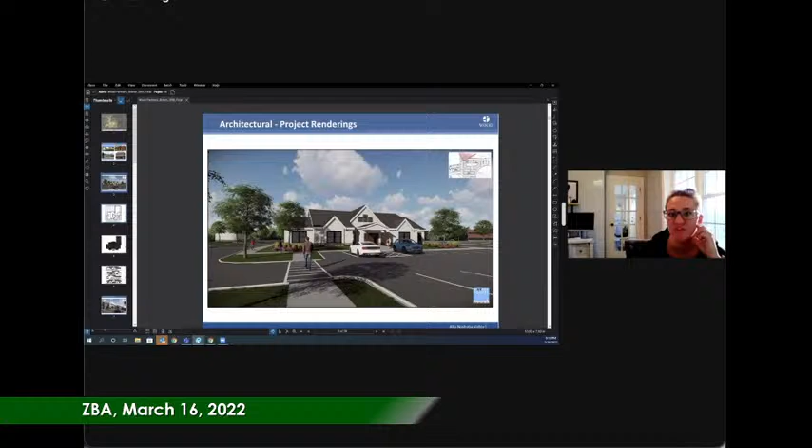What's the square footage of the Clubhouse Building? Let me see. I can have a number written here, but Jim, do you have that number handy? Yeah, it's just under 5,000 square feet. Okay, thank you. There you go.

So again, here's the plan of that Clubhouse Building. Again, it's broken up to break up the scale. It's not a simple box.

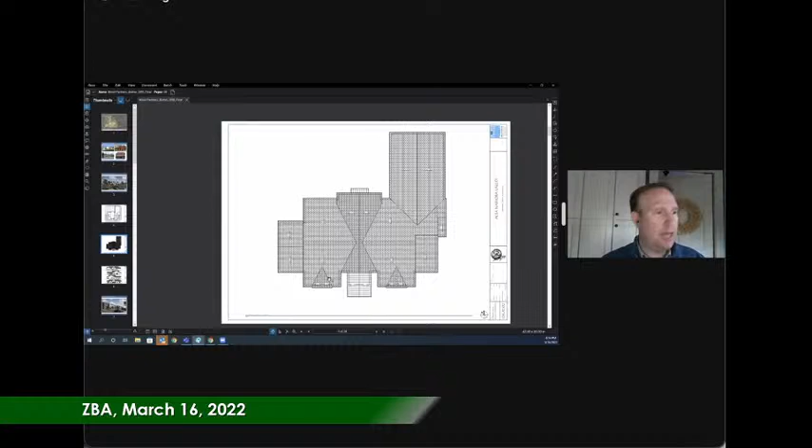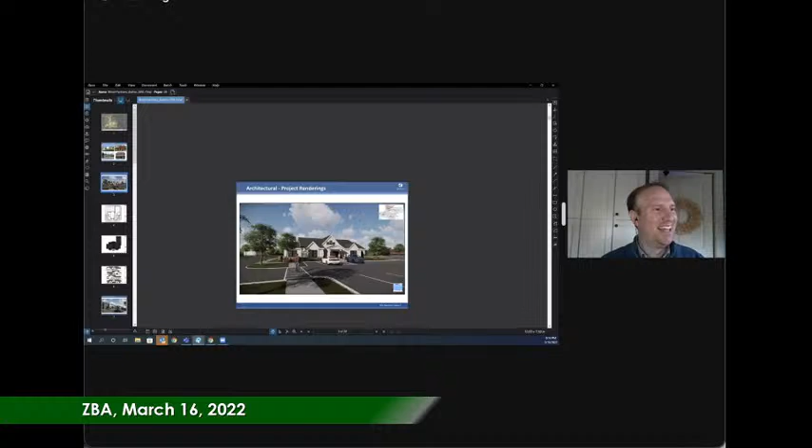And then that further allows us to break up the roof plan. As far as traditional New England architecture is concerned, there's a lot of variation in the roof plan to break up the scale, traditional New England gables, all working together to create a nice piece of architecture at a scale that's appropriate to its use.

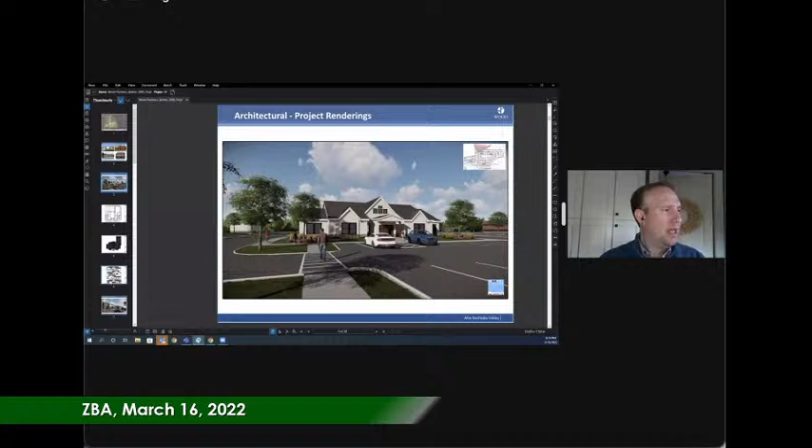And then the last slide in relation to the clubhouse. I don't know why these are all jumping around in scale, I apologize for that.

These are the rendered elevations of the building. So you can see we're doing traditional punched windows. We've got a mix of horizontal lap siding, and at the entry piece we have some board and batten siding. We've got some elements really indicative of barn architecture, both on this end and at the main entry. We did talk with the DRB about our fenestration here, and that's something we're going to be looking at a little bit more closely over the coming weeks. But I think from an architectural scale and general aesthetic, we have some fine tuning to do, but by and large, this is the grand scheme of the approach for that building.

Any questions on this one, or you want me to just keep going?

No, Adam. One comment was just for the board members that weren't able to participate or listen in on the DRB. The DRB was favorable to this design. They did appreciate the inclusion of the precedents and the general window structures and the roof lines and things like that. So it was favorably received with some comments.

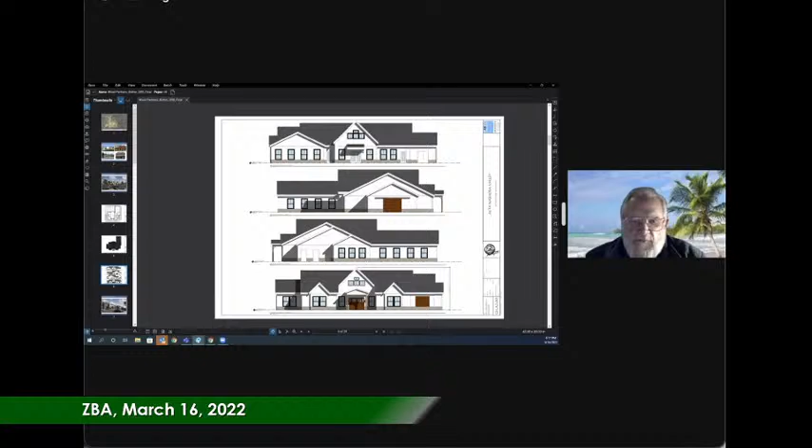It looks beautiful, but is there consideration given to where solar panels might be mounted on the southern face? DRB asked that as well. I know that Wood Partners is currently working on a project that they're putting solar panels on. And yep, if you want to respond further.

Yeah, I'll jump in and answer that, and Mike, feel free to jump in as well. Tony, our focus right now on solar has been on the two larger buildings. We hadn't necessarily looked at it for the clubhouse, and we didn't feel like we had a lot of space to work with on the two smaller buildings, if you will, but the focus on what we had been talking about internally was on the two larger U-shaped buildings, but it's something we can look at here as well.

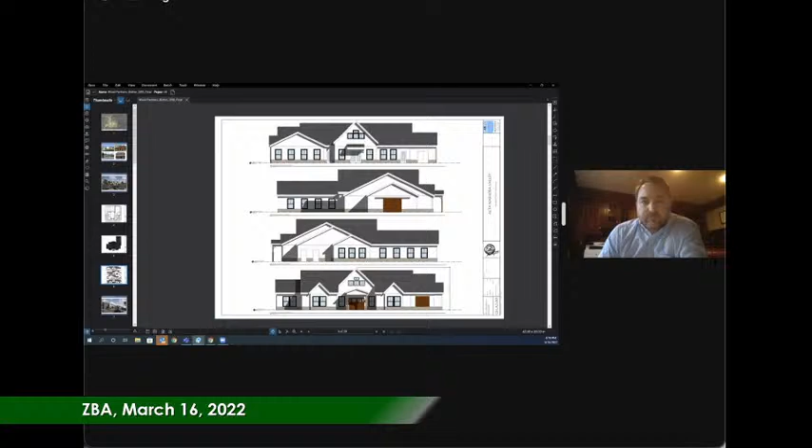Any other questions at this point? Or should I just keep trucking?

Adam, just real quick, because I know it came up sort of toward the end in the DRB, just orientation, so everybody's clear on sort of what you see when you come in the drive and what we're looking at, if you don't mind. I know the site plan wasn't loading all that well, but if you could try that again, just to make sure everybody's clear on that. Yeah, let me just give it one second here.

All right, so we've got Main Street here, we have the main entry in. We've already talked about the clubhouse. This is the mail package room, I'll be coming back to that one. We've got two U-shaped multifamily buildings here, these are both 3-story buildings, and I'll be going through the architecture on those. And then we've got two bar-shaped multifamily buildings, again these are 3-story. And then this building, and this building, those are garages. They're enclosed garages for tenants that desire that. And we also have the architecture of those buildings here in this presentation, I'll be getting to them.

Any further questions there? Okay.

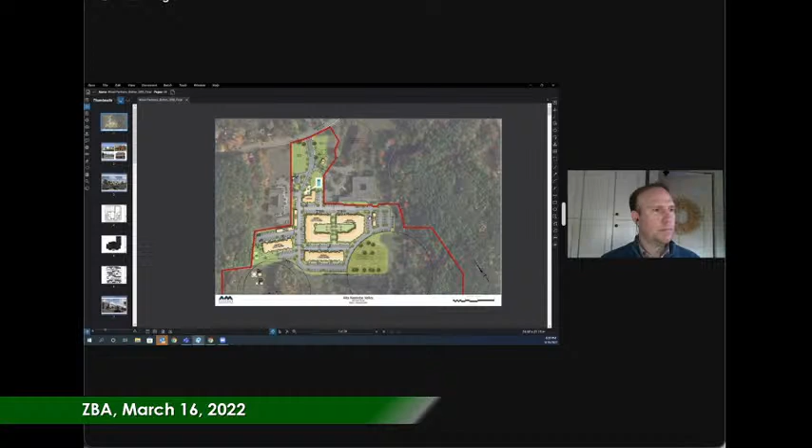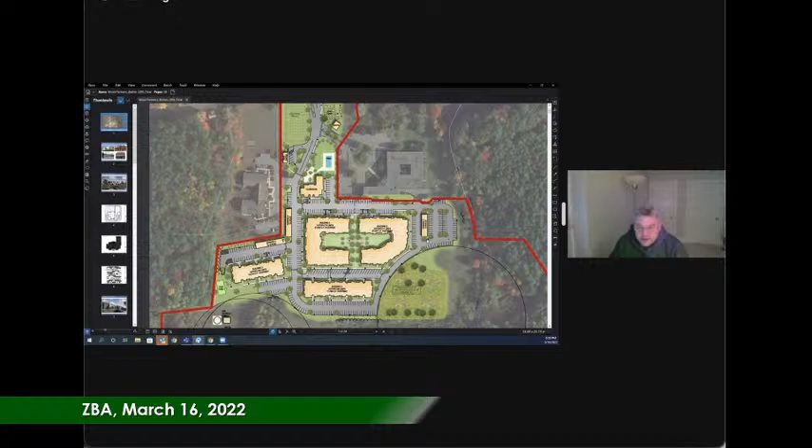The one near where your cursor is. I was just wondering about placement on that. Why wouldn't you opt to put it further away? Does it block people's views of their cars? Might it be a security thing where people can't see what's going on behind that building? Just throwing it out there. I didn't know why you chose to put it so close to the building.

It's a valid point. I think part of it is that this is certainly a nice amenity for some residents, and something they'd pay a premium for. So to have easy access from your residential building to your garage space is certainly advantageous. But we should consider sight lines and security — if you can't see out your window to see your vehicle, it's a little more troublesome than if the vehicle is easily seen.

Is there lighting in that general vicinity too? I know we're getting away from this, but I'm just wondering what the lighting is like there. Yeah, you can see these little black boxes around the perimeter of the parking lot — those are the exterior light fixtures. We don't have them in this package unless civil has it on theirs, but they'd be cut-off light poles in this area, for a security standpoint.

But the point is well taken that this certainly blocks the view to these parking spaces on the backside. That's something we can talk through with the development team, with the landscape architect, with the civil engineer.

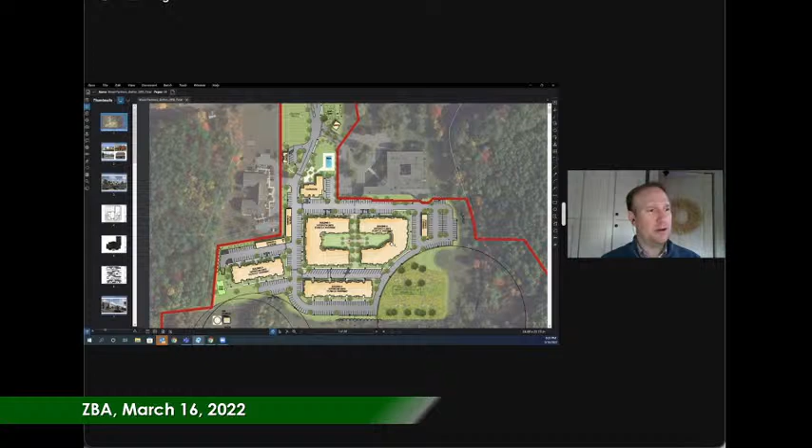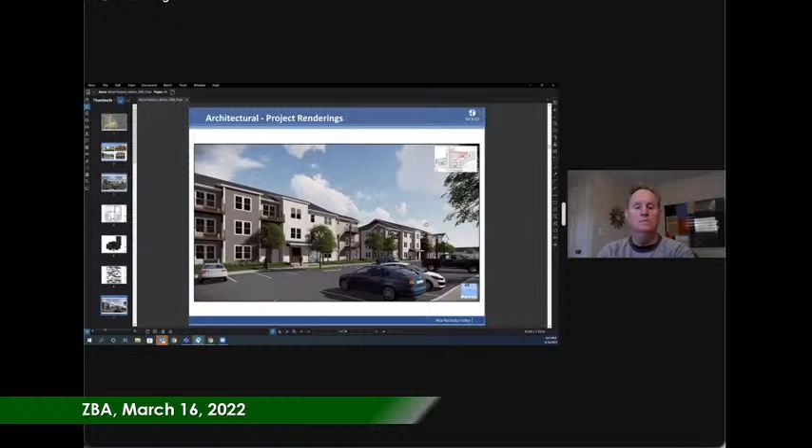With that, I'm going to move on to the architecture of the two U-shaped buildings, and I'll pull up this slide next. Again, you can see a small site plan here, and this cone of view basically shows where you'd be positioned and what you'd be looking at. In this case, you're looking at the edge of one C-shaped building and then the other edge of the other C-shaped building. Again, we've tried to break down the scale of these buildings, present them so they don't seem overly large, and incorporate elements indicative of the architecture there in Bolton.

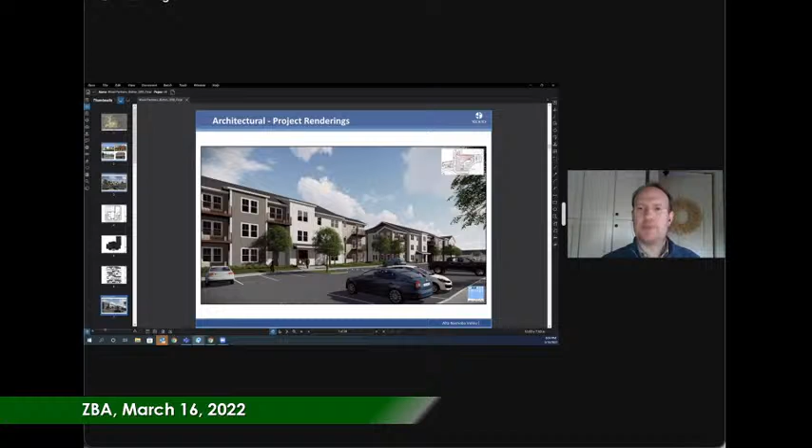Predominantly we've got horizontal siding with vertical trim bands that would probably be AZEK or something similar. We've got balconies with railings for the residential units, and architectural elements at the main entry so you identify the entry as something a little different. It's hard to see in this rendering, but if I scroll in, you can see the horizontal siding — we're using vertical board and batten at the main entry pieces, just so they really get identified as where the entrances of these buildings are, make the entrances a little special, and break up the architecture, again making it more consistent with things you have there in Bolton.

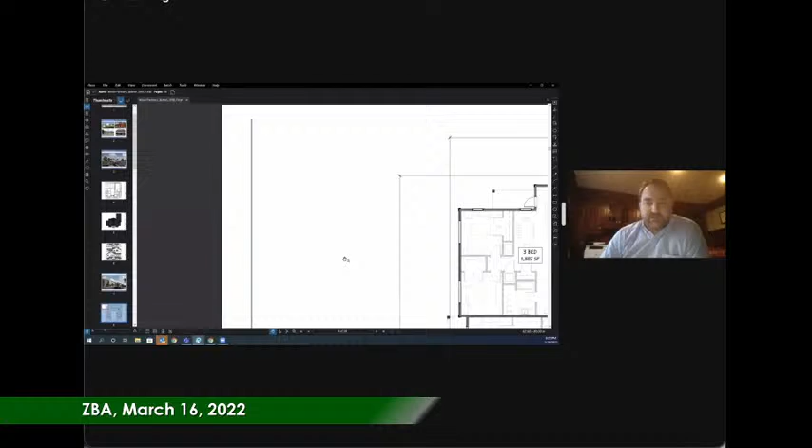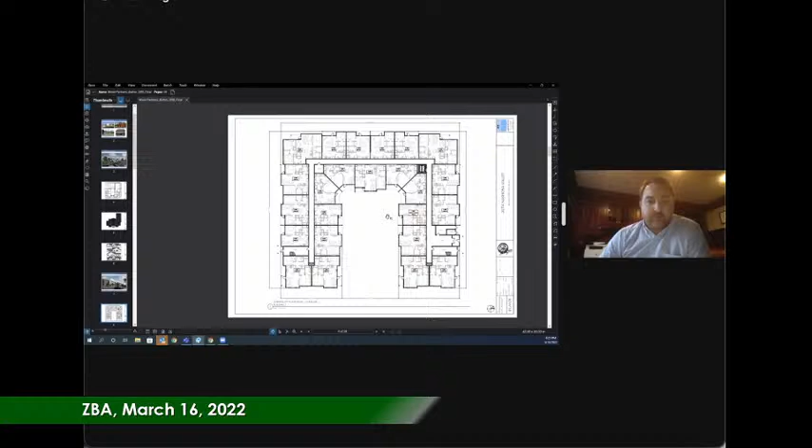Adam, if I could just jump in. Mr. Chair, similar to what you mentioned with the clubhouse, I don't want to speak for the DRB, but I think overall the buildings were well received. There were a handful of comments we're looking at, particularly on that elevation we just saw. Adam, I don't mean to steal your thunder if you're going to get there, but there were a couple of comments, including looking at some pops of color maybe in the doorways and things like that that we're considering as well.

There was a comment about the doors to the right of center, by the balcony decks, where there's a gap in height with the windows and doors. We did have a conversation about these, and about these kitchen windows as well.

One comment was that they wish these kitchen windows were larger. But if they become larger, it interferes with our upper cabinet space in the kitchen, so that's something we're looking at.

Another comment was about a door with double hung windows right beside it. The double hungs get pulled up off the floor since you wouldn't have those all the way down, and that creates a differentiation in height. We had a conversation about that because we like these large windows, as they provide light and air into the units, but we understand it creates an interesting detail between the doorway and the windows themselves. It's something we're going to look at.

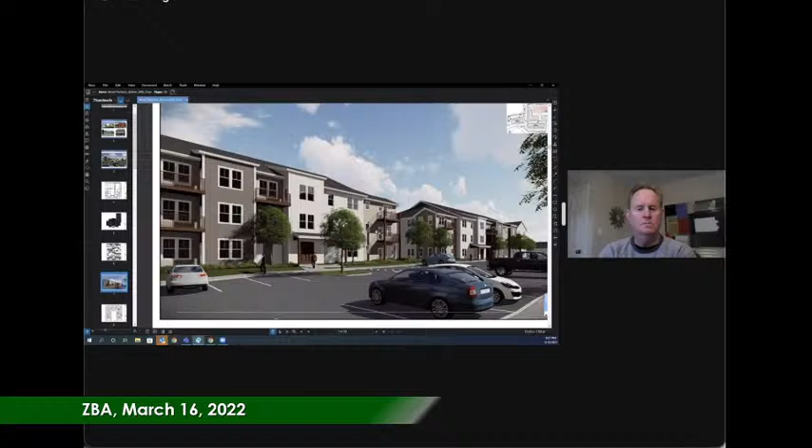We got some excellent feedback, and they're all things we're going through at this point.

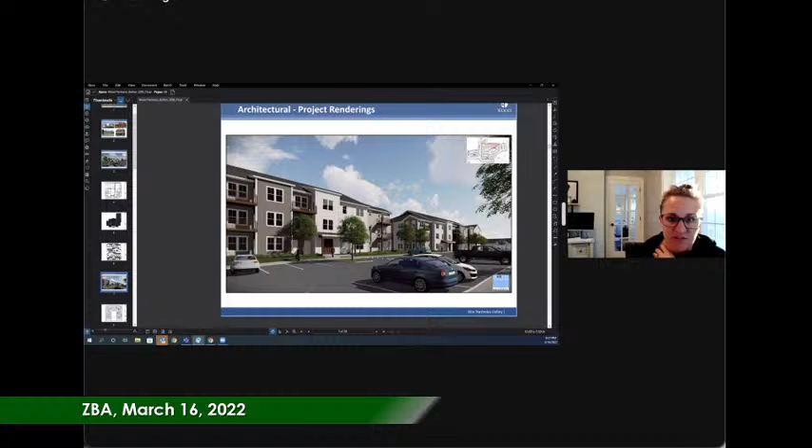Can I ask what the material is for what looks like wood accents around the entry? What is the intended material of those posts? Those won't be real wood posts, I'm assuming. We're still determining if they'll be actual wood or a steel column encased in either wood or a wood-like material.

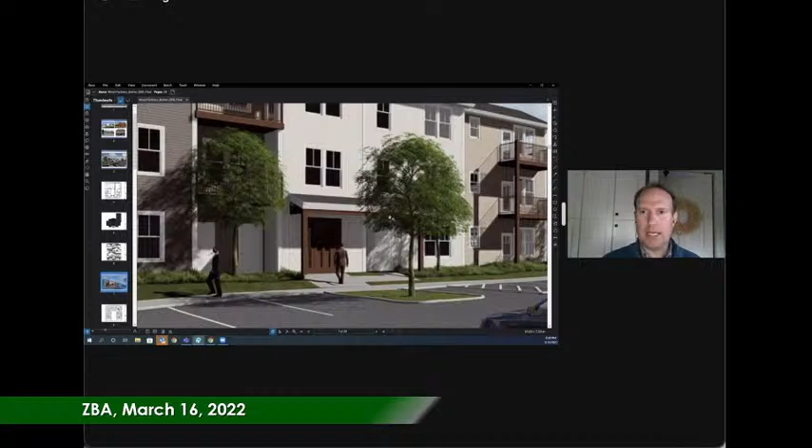We haven't gone through a full structural analysis of this building yet, so we need to work with our structural engineer to determine what we need to do. We need to leave it a little open-ended at this point, as far as the look and feel is concerned.

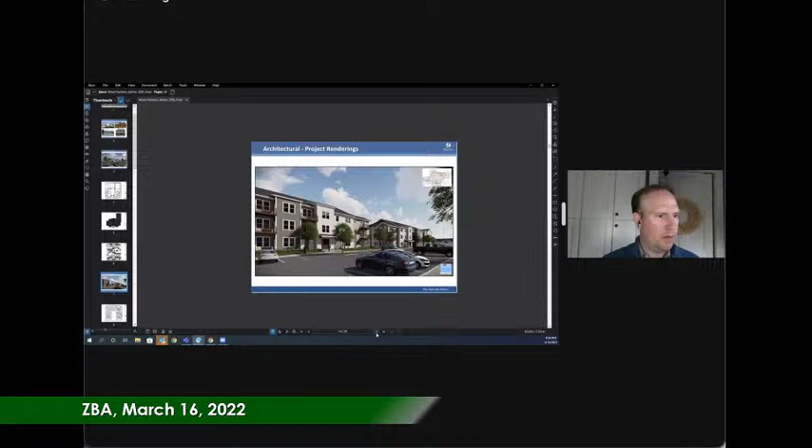The last slide I have here is the roof plan. We've got a lot of articulation in the roof—some gables, some sheds. We're using the roof for our mechanical systems, so we've taken a piece out of the gable roof to create a flat area where we can put all the condenser units. This allows us to clean up the ground level and get them up out of the way.

And again, from a solar perspective on these roofs, Wood Partners is currently doing a project using solar. It's something that deserves further exploration for this project, but we're not there quite yet.

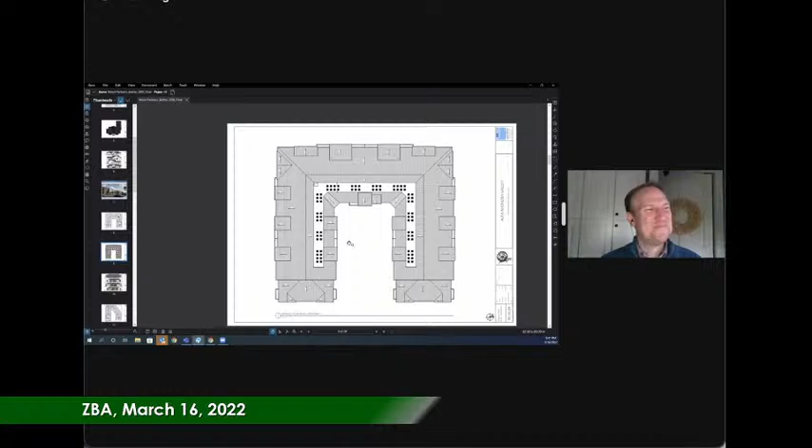Let me jump back to that slide. So again, here's the flat portion of that roof. This is at the roof level—you really have to be quite a ways away in order to see it, and given that it's on the inside of the courtyard of the U shape, it's pretty well screened.

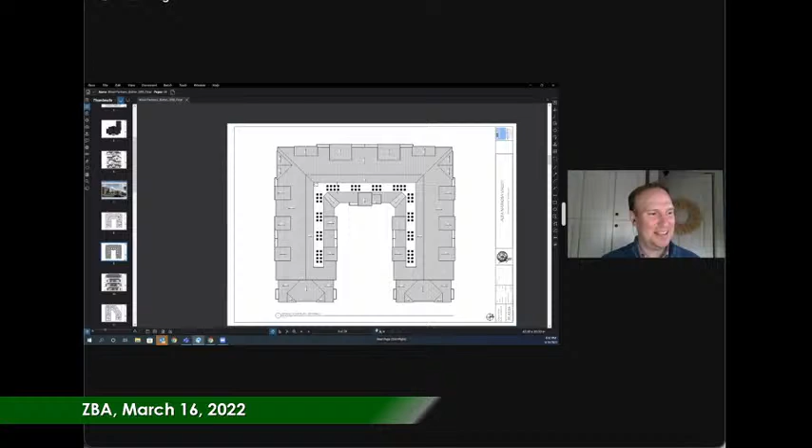For anyone who has dogs and does Zoom meetings, you know what I'm dealing with. I have cats, and one night last week, the cats were in our room, in the bedroom, and a neighbor's dog barked at like 1 in the morning, sent the cats flying. As they ran across the bed, they ran across my head. My scalp and my head had puncture wounds and blood spurting. I'm like, what's going on? So yeah, dogs are, it happens.

Well, the pups went to daycare today. I was hoping they'd be asleep by now, but clearly they're not.

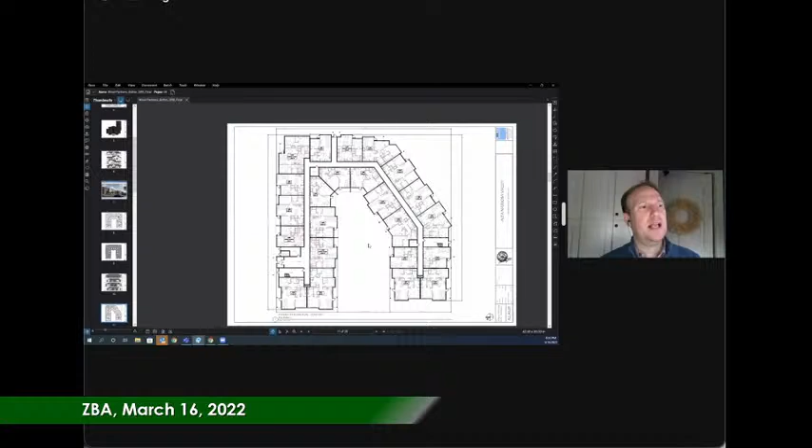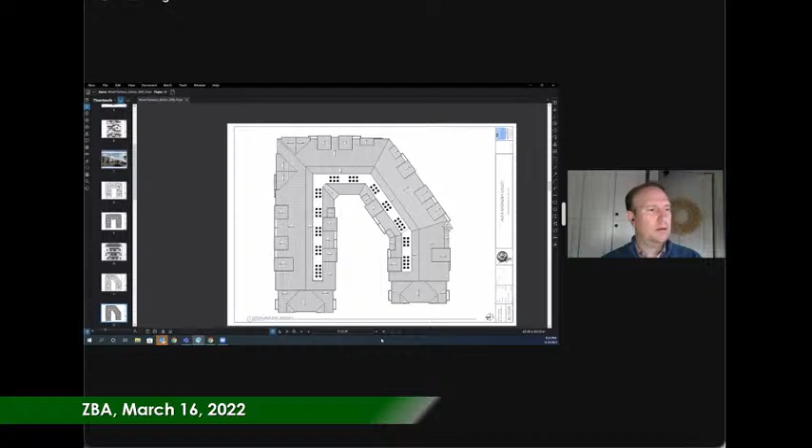Similar design, again very similar on the roof plan design. Very similar in the approach to the elevations for the 2 U-shaped buildings. Right now we have the same color scheme on both.

And with that, I will move on to the bar buildings. So if you can see in this site plan, the cone of vision here - we're standing just outside of the U-shaped buildings, looking across the bar building on the southern portion of the site. In these buildings, we picked up the red color you often see around town. It was part of our discussion with the DRB from last week in terms of incorporating the red color, perhaps with the other buildings, and that's something we're looking at.

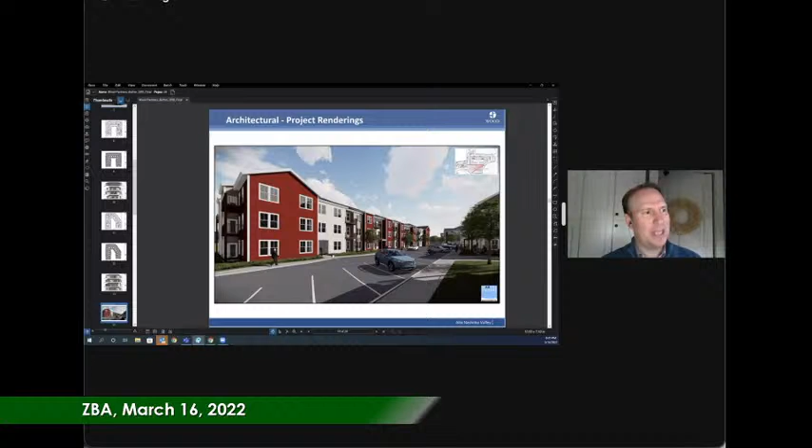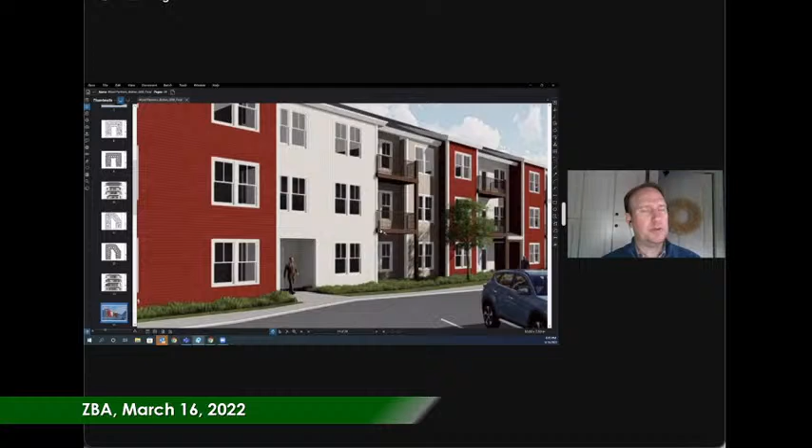Again you see some balconies, you see a building entry here. The approach is that the entry is designated by the vertical board and batten, where the body of the building is more of the horizontal lap siding. Very similar approach to the balconies and railings in terms of a warmer, natural material.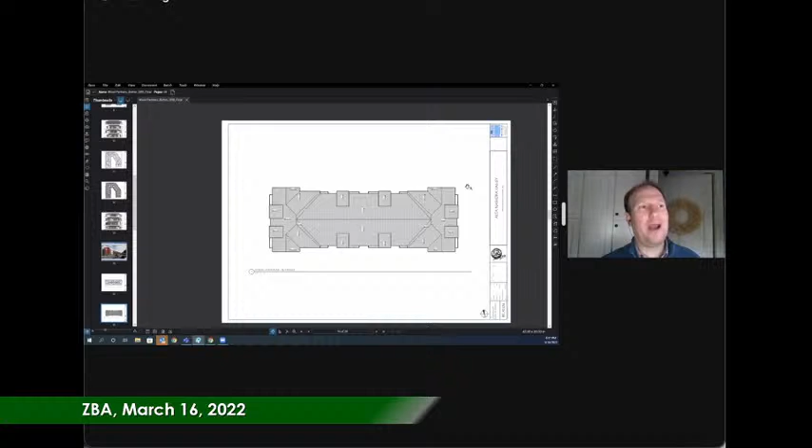Again we've got a lot of articulation in the facade, so it's not just a straight shot. Again the roof plan is broken up - you see we've got some sheds, some gables, and the approach to this building is slightly different in that we're not proposing to put the mechanical units on the roof. These buildings, the mechanical units would go on the ground, partially because there wouldn't be as many units required for these buildings.

Keep moving here. Again, the architectural 2-dimensional renderings. We've got the red color, we've got the white, which is the vertical board and batten, and then we've got horizontal clapboard siding. A similar approach to the balconies here.

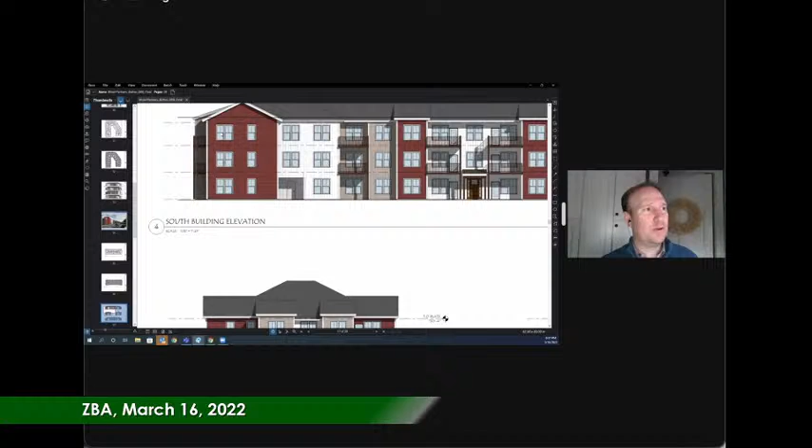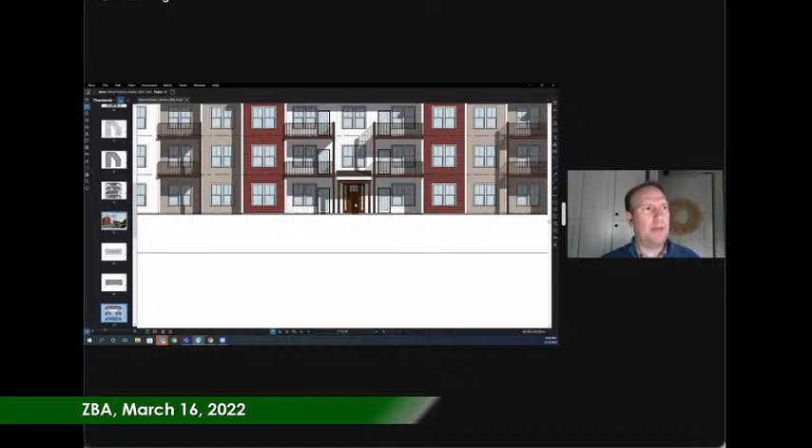Double hung windows that are punched fenestration, sometimes single, sometimes ganged together. Nice large windows - it's very important that we provide a lot of natural light into the units, so these aren't tiny rinky-dink windows, these are providing a lot of natural light. And again, some nice articulation and detailing around the entries - nice wood doors, side lights, transom windows, and a small shed roof over the top of it.

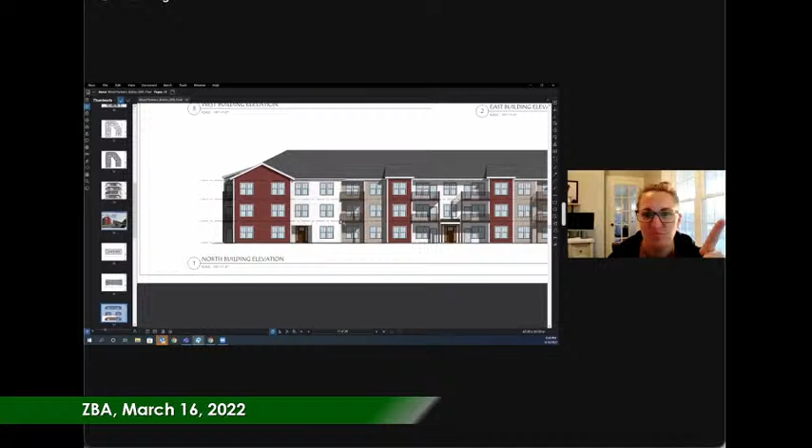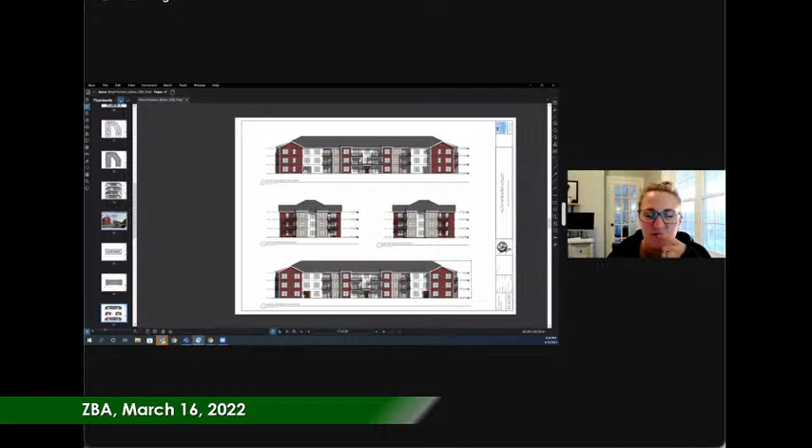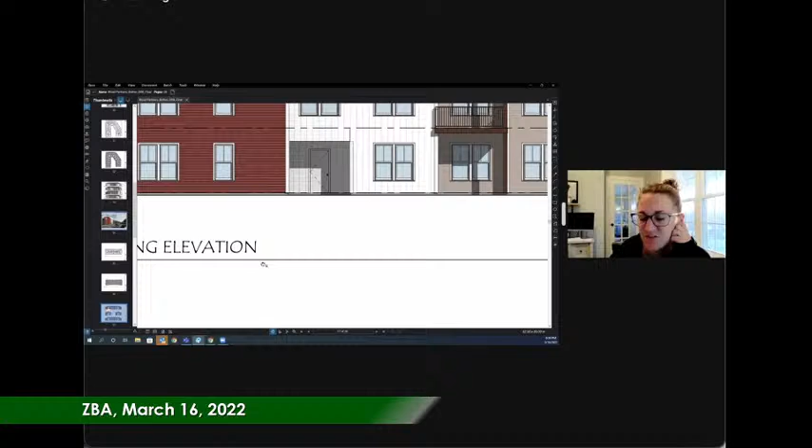So the door you just described is only for the center, I'll call it a corridor, but you explained it's not really a corridor, right? So are those two - oh wait, okay. Yeah, so the question I was going to ask was why you just had plain white doors that didn't have windows in the first picture. There they just look like plain white doors - is that the plan? The reason I'm asking is that won't let as much natural light in, I would assume. So these doors align with their opposite counterpart. Because of the way the buildings are oriented on site, they only have a front door and a back door. So what we've done is we've created a nice front door and a functional back door.

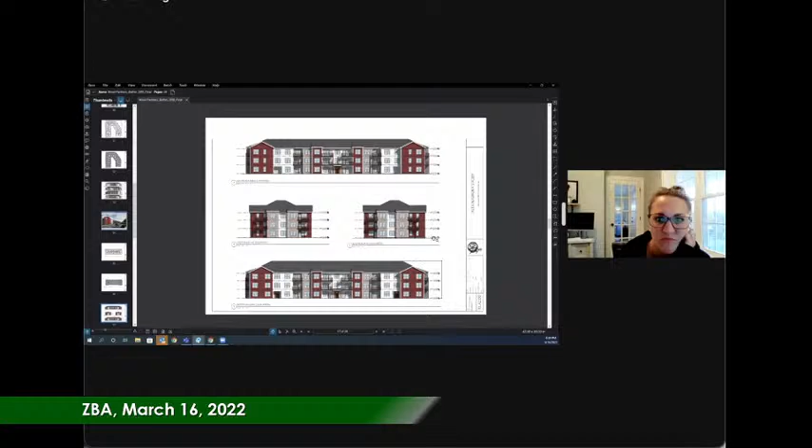So I will keep moving along here. I wasn't at the design review board meeting, but I will say that I do like that color scheme better than the U-shaped building.

With the red, yeah. Okay, and that's something we talked about for quite a while. Is it something we can incorporate into the U-shaped buildings? It's something we're looking at now.

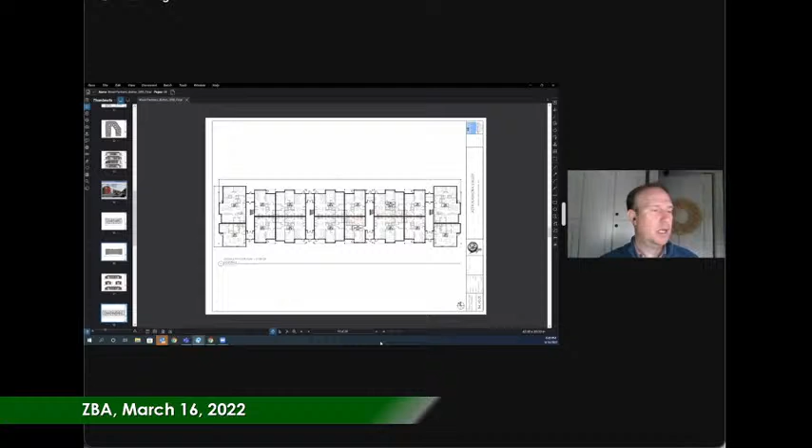So then we've got the other building, which is a little bit larger, has 4 entries, each entry serving 4 units, 4 units, 4, 4. So the building is slightly larger. Again, very similar approach to the roof. The mechanical units for this building would be pad mounted. Color scheme very similar.

And unless there are questions about the bar buildings, I will move on to these.

So mentioned in the site plan, we have several garage buildings. These are single-story buildings, individual garage doors for those tenants that want to park their car in an enclosed space. We've really tried to create nice but simple buildings here. As you can see, single story, punching up a gable here to break up that roof line. Nice decorative light fixtures in between every couple of garage doors.

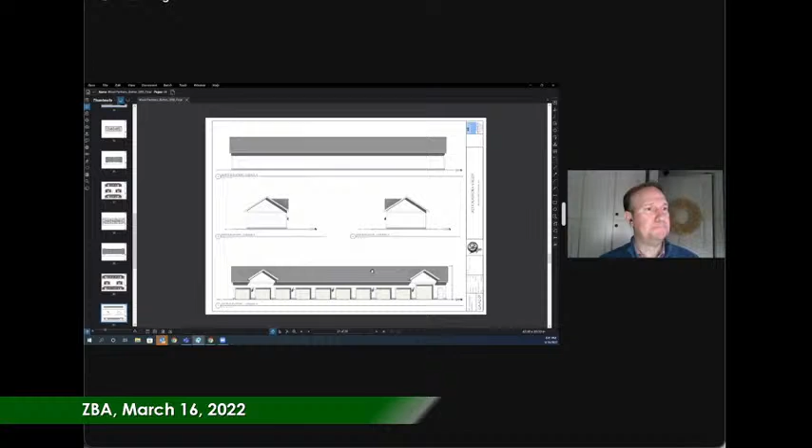Not a lot going on the backside, because this is a little bit more of a utility building, but a utility building that has been designed with some real intent to the features. If you look at the end gable, we've got horizontal siding here, and then some vertical type siding on the gable ends.

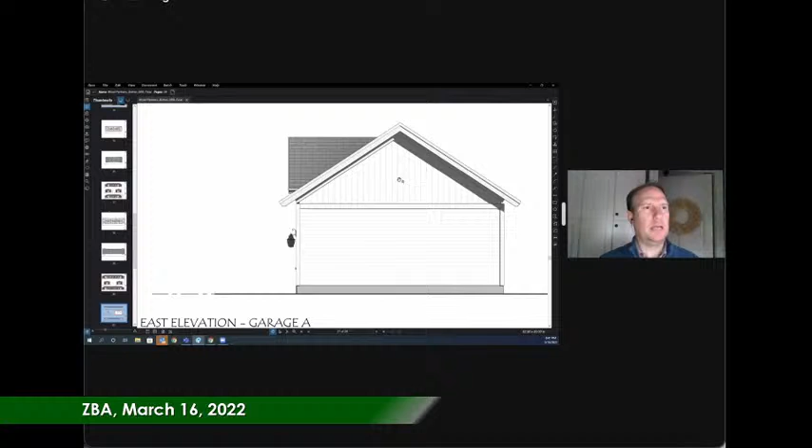Adam, I'd just like to add that we had some good comments related to the garage building at the DRB meeting. One of the comments we're going to incorporate is the gables shown on the Clubhouse building - they're a little more articulate, a little tall, steeper pitch. So that's one of the items we're going to be incorporating to the garage, as well as the mail package room, which we'll get to in a couple slides.

And what is the reason for having one bay be larger? You expect some sort of commercial vehicle in there? No, that's an ADA accessible space. Okay, right. It has a separate door. So it needs to be a door with it, a little bit taller to accommodate a handicap van, if that's what the occupant has, and then it needs to have its own pedestrian door to go with it.

Are there a minimum number of those that you need for this project? Yes, from an ADA standpoint, we have to look at total number of units and total number of accessible units. The same is true of our garage spaces, and the same is true of our parking spaces on site. So we've been going through all those calculations, making sure we have the requisite number.

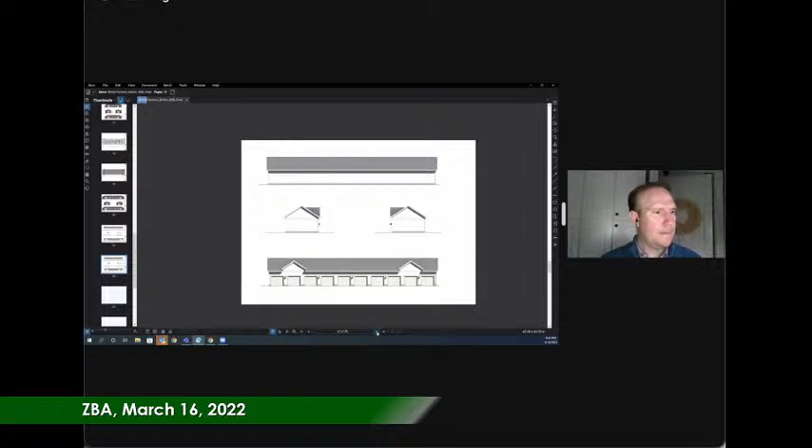So of the garages, is this the only one that's an accessible garage unit? This is the only bay within this garage building. Let me just see - so this is the other garage building. You can see it does not have a larger door, it does not have a pedestrian door next to it. So the calculation has been done, and for this building it was not required.

But from an architectural standpoint, it's still a very similar approach. So there are 3 garages, correct? And you're saying only one of them has an accessible bay? That's correct, yeah - it's a percentage of the overall garage spaces that are required.

I have a question. It looks like there's quite a bit of space there in the attic of these garages. Is that available for storage, or are there trusses in the way? There'll be trusses. They'll actually have a flat roof inside at the bottom of each truss. Okay.

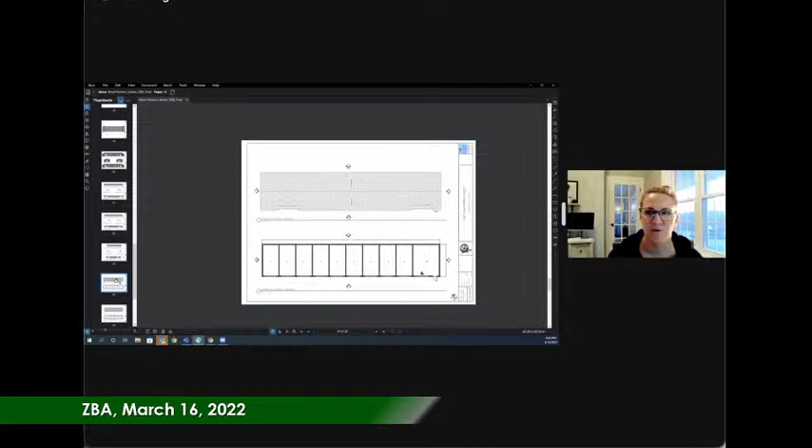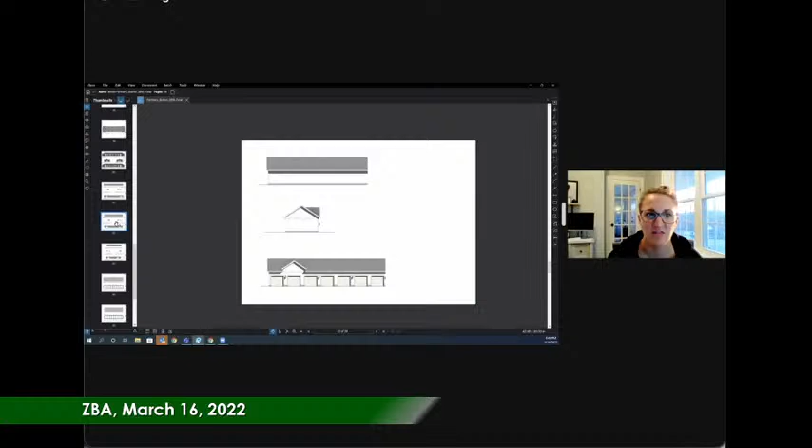Can I ask a question about lighting? If you go back to the handicapped accessible one, have you considered putting a light closer to that door? I'm sorry, it's on the edge.

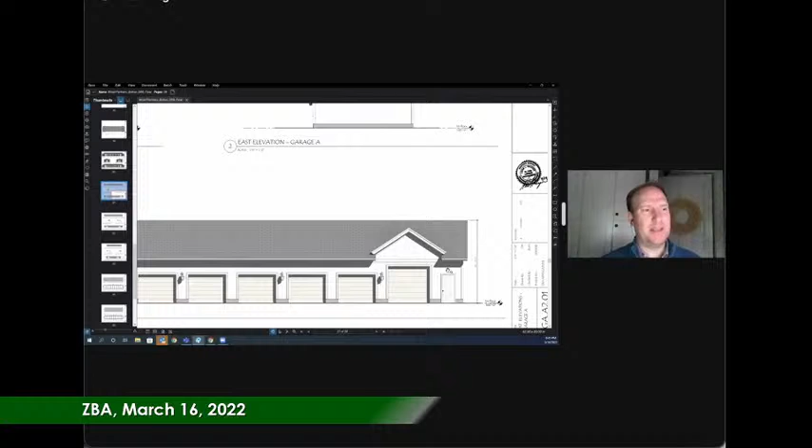You can see there's a light on one side, but there's not really any lighting around that door specifically. So if you're trying to get in, I can imagine that would be pretty dark. Yeah, I think we would need to have one here. Whether it's one of these decorative fixtures, I don't know, but we would definitely have some sort of fixture for it.

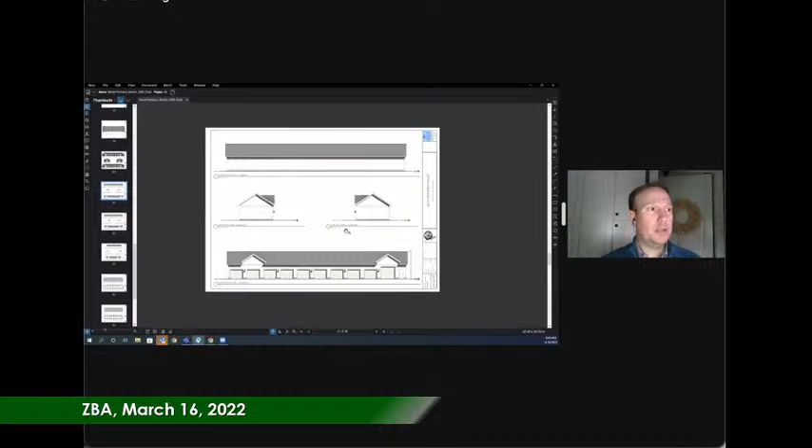Again, I apologize for my very vocal dogs this evening.

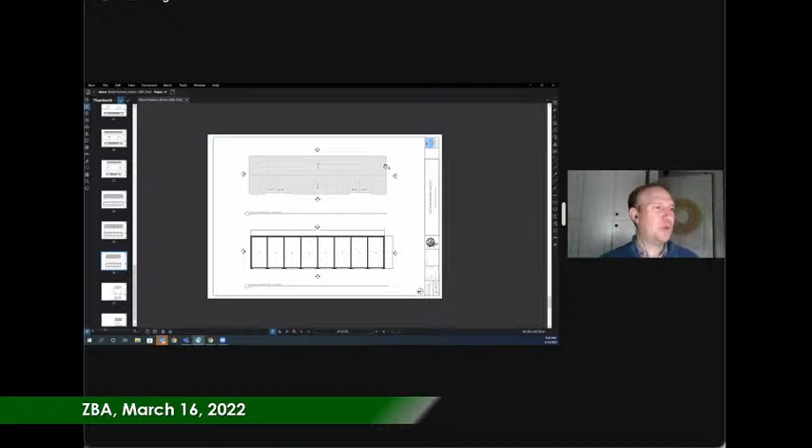So this was the plan of the 3rd garage building, and this one's a little bit smaller. Again, I just wanted to point out the gables on the roof to break up the roof a little bit. This one's very simple. It does not have an accessible space within it.

I think this is the last building in my presentation package. This is our mail and parcel room. If you recall in the site plan, when you first enter into the site, on the right-hand side, we have a mail and parcel room. With any multifamily housing project, as you can imagine, parcel storage has become a very important component these days, so many people are having Amazon deliveries and grocery deliveries and whatnot. So this building serves as both US postal delivery and parcel delivery on the other side.

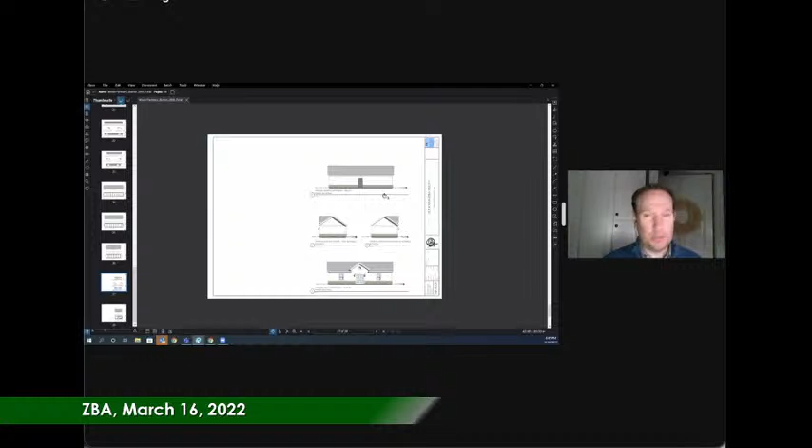Again, really a jewel box building. We've tried to keep the detailing very simple. We do have a couple of windows here on the front facade, but we don't have any windows on the back because we need those wall surfaces for the parcel packages and for the mailboxes.

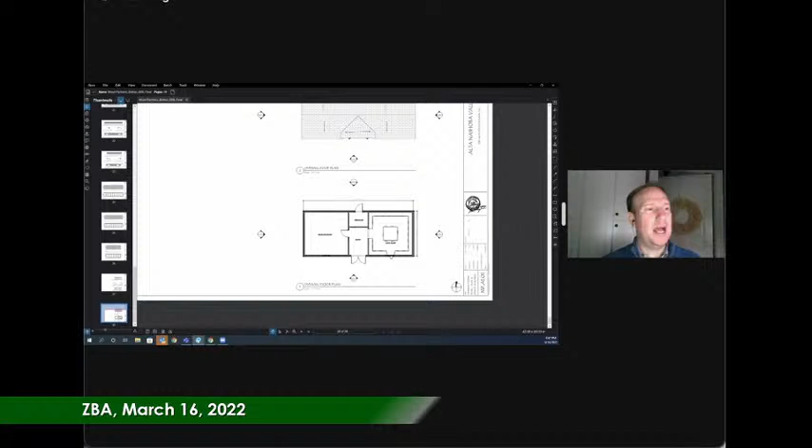And you can see here on my final slide, which we have a small roof plan, the main gable over the entry. And then the layout of that parcel room, half of it is the package side, the other half is the mail room. We need a small sprinkler room in the back because this room is required to be sprinklered. And those 2 small windows you see on the front of that building are there because we need the wall surface for everything else.

And that concludes my architectural presentation. I would be more than happy to answer any questions that anyone has, or we can do that at the end. It's up to you. Thank you, Adam.

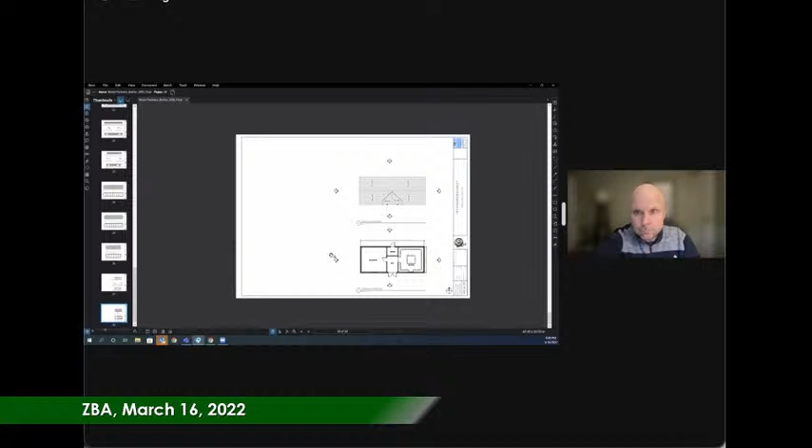If I don't hear any questions, why don't we go into the landscaping that is going to accompany these buildings and then the site.

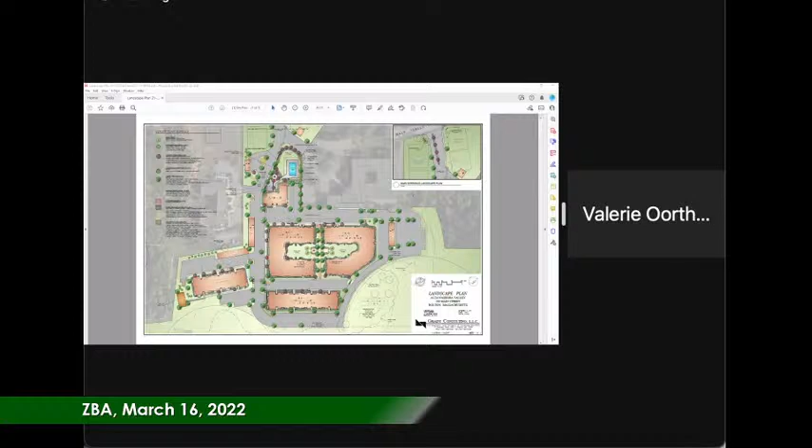Yes, we have. The applicant was able to attend the meeting last Thursday. I've summarized their comments in the memo, though we haven't had the opportunity for the design review board to review my summary, so there could be some things misstated, or I could have left some things out.

Pretty thorough, I guess. It's on its way at some point, but anyway, just thought I'd ask. It is in the packets that I provided. I must have missed it, sorry about that.

Okay, and the design review board did indicate that they were looking at this presentation fairly contemporaneous with what was presented. So they were also going to dive a little deeper into the plans included in the application set. But overall, feedback in general for both the plantings, the landscaping, and the architectural design, the board spoke pretty favorably. This was a great start to a project.

One question I do have is about the landscaping at the entry of the project, like what's coming right off of 117 on Main Street. Has there been any thought? It's hard for me to see, I'm also partially blind to see that small inset, but has there been any thought to the visibility coming out of that area? I know there's a couple of largish trees there now, and I know things are going to change because the leach field is going to go there. But I'm just interested to hear perspective on plantings in that area and making sure there's a lot of visibility so people can see when they're trying to pull in or out of there.

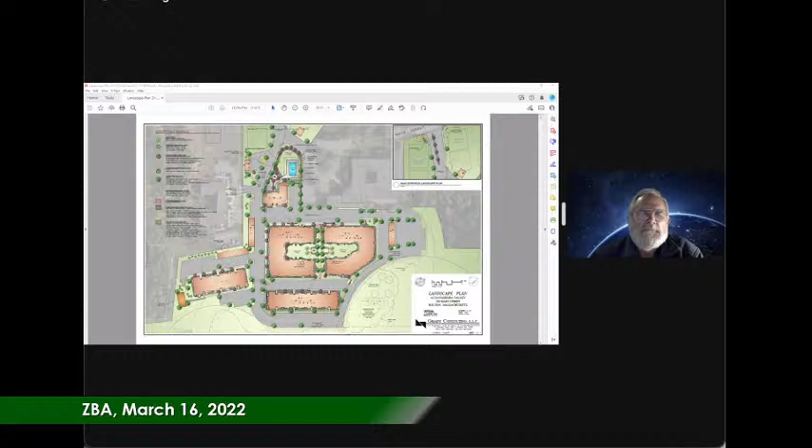Would any of these areas need to be mowed regularly? I would guess there'd be some maintenance around the buildings, in the courtyards. But anything around the perimeter, we would probably want it to not get back to natural, but let those areas grow a little bit. Maybe they're mowed once or twice a year, as opposed to weekly around the manicured areas. But anything in those well zones, we wouldn't be touching. So maybe just maintenance to keep it under control every once in a while.

Anthony, just in case I missed it for protocol, did you identify yourself as resident and your address? I'm sorry, this is Tony Jagodnik, East End Road. Okay, I said that earlier, I guess. I may have missed it. I just wanted to be sure. Yeah, sure, thank you.

I also do think this is a really good start. The buildings certainly were given thoughtfulness to look how they would sort of have the look and feel of the surrounding Bolton community. And so appreciate the work that's gone into it so far. Thank you.

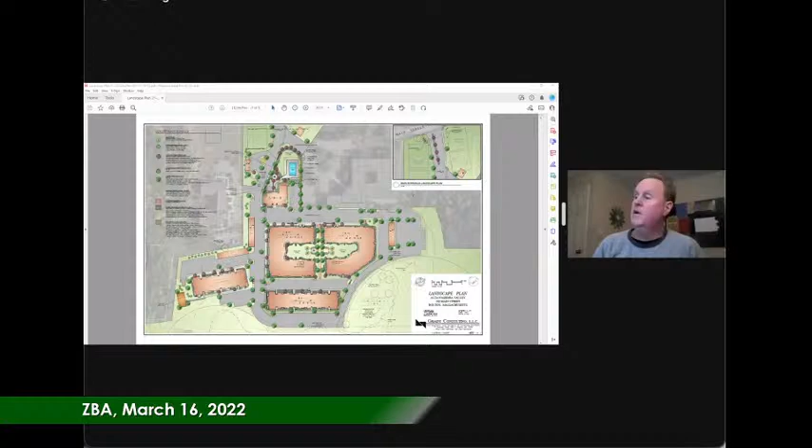Okay, how's that work for the board members? I can make the 14th. I can live with that. Is there any chance we could do Monday the 11th? I don't know if that works for anybody.

The 14th could actually work. I think Mondays are typically better for me, but I could make the 14th work. Okay, Mr. Chairman, if I may, I believe our counsel is not available on the 14th.

Okay, I know there's a lot of competing interests here, so if I'm the Tuesday problem, just for what it's worth. Right, that's what I'm saying. The Tuesday problem is I can't do 6. If we did 6:30 I could probably make it, or 7, but 6 o'clock on Tuesday is too early.

It doesn't have to start at 6:30, but we've been doing that because during the COVID period people have been home and it worked, but as schedules change we can always have a different time slot to start it. So does Tuesday work better for people if it's at 7?

Does that work for you, Valerie, Tuesday? Sure. Would that work for Brian and Andy and Brad? Tuesday works. Okay, Tuesday works for us, Mr. Chairman. Okay.

So why don't we propose Tuesday, April 12th at 7 p.m.? That works for me. Okay.

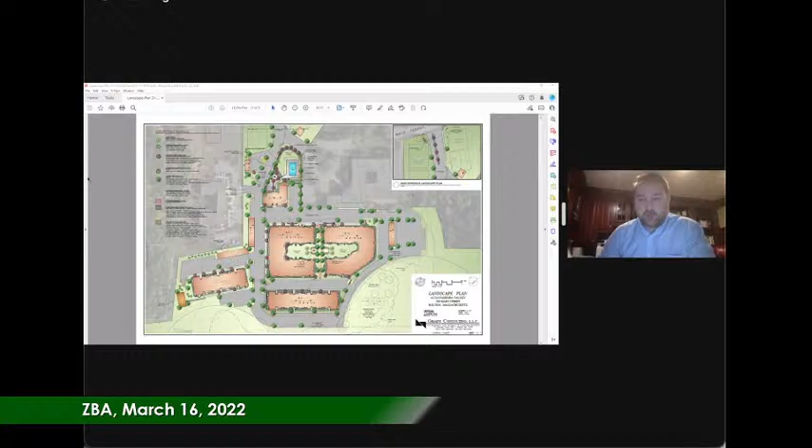So yeah, I'd like to know the numbers at some point. Good intentions, Andy. If I may, we'll absolutely have those numbers for you for the next meeting. And certainly, if we have one, I can't imagine how two would be way too much, so we're happy to look at that. Thank you.

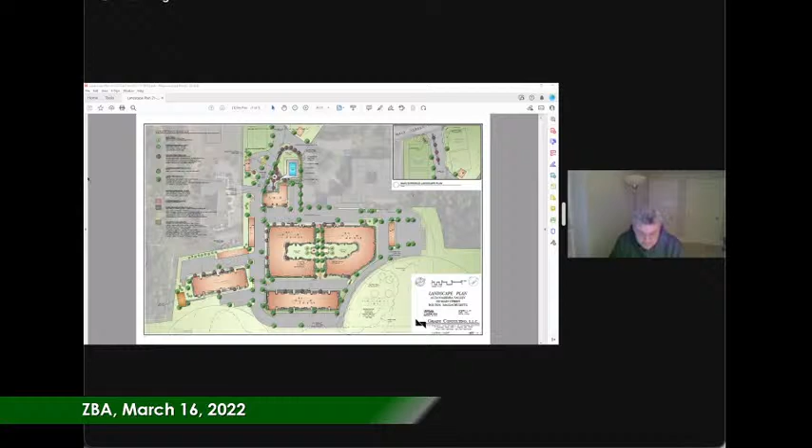So if no other questions, do we have a motion to continue to April 12th at 7 p.m.? Move that we continue on April 12th at 7 p.m.